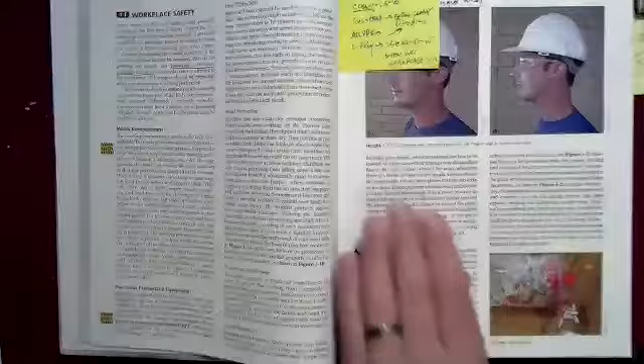So on page, I guess this is page 4 and 5 in the second edition, we get into workplace safety. The interesting thing about workplace safety is it's almost entirely behavior dependent — either the behavior of the individual who might be doing something unsafe, or the behavior of the individual who might be setting up an unsafe condition by their action or inaction for the next guy along. So it's interesting to me that horseplay is considered one of the most common unsafe acts.

If you wonder why I really come down on anybody doing horseplay in the classroom, that's because it is a big problem with workplace safety. In many classrooms, horseplay — kind of goofing around, bumping into your buddy and smacking him or whatever — I've had this in my classroom. It's sort of good, fun, jocular behavior, but don't do it. Don't do it in the classroom, and don't do it in the workplace. Horseplay is a major issue.

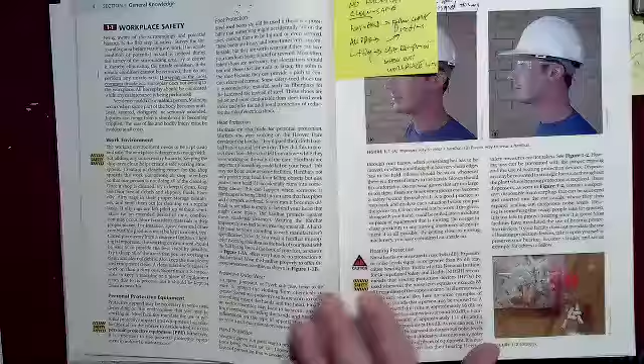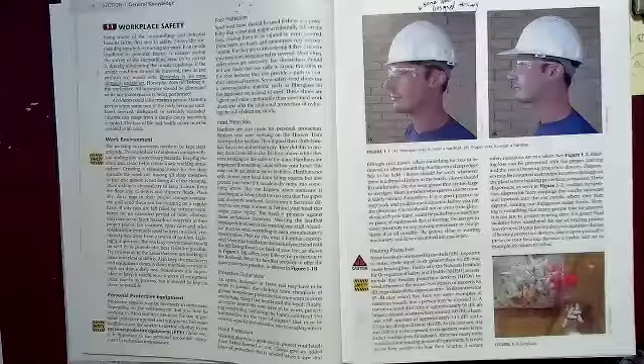Another key fact in this first area here is basically the work environment. In the old school manufacturing facilities, especially machine shops, you would always have that guy who would very carefully sweep and clean his area. At the end of every day, it was expected that you would make your area spotless. The cleanliness of your area was an indication of how much pride you had in your area, and how careful you were. That sort of work ethic has sort of slipped in a lot of workplaces where they have professional cleaning crews who come in at off shifts and do the cleaning.

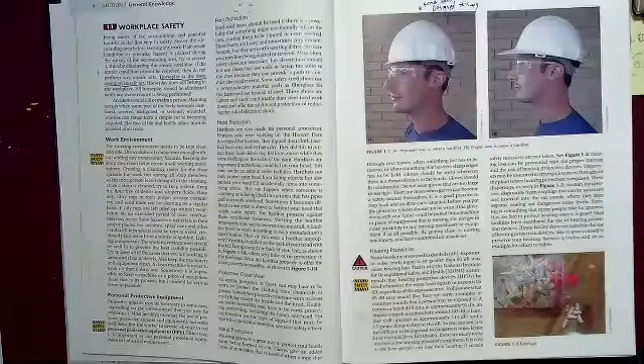But I think it's really important — the cleaner and more neat you have your workplace, the more safe it is. If you know how to reach out and find the right tool, if you don't have an oil drip or chips lying on the ground that you may step into and slip on, then you're going to have a much safer environment. So cleanliness is very, very important.

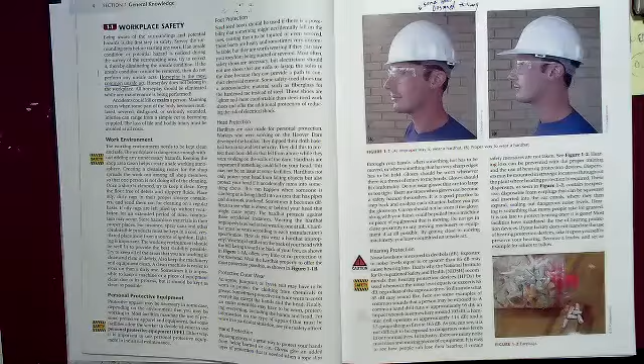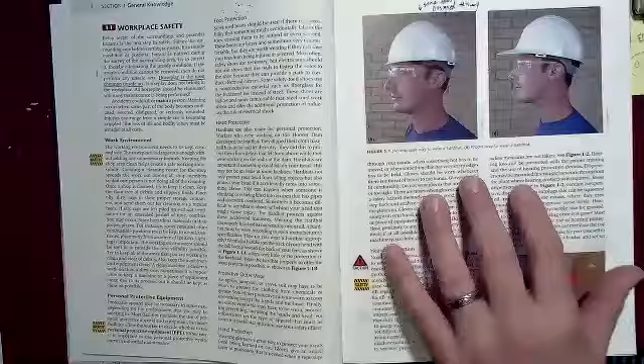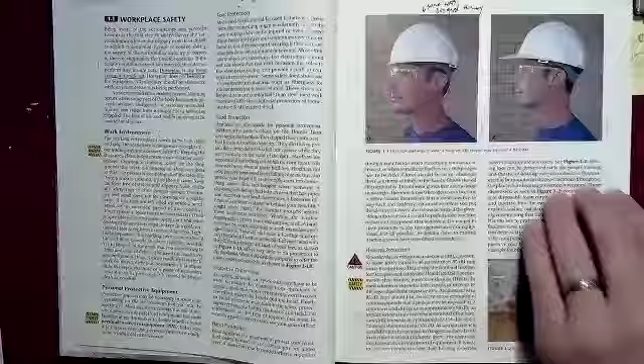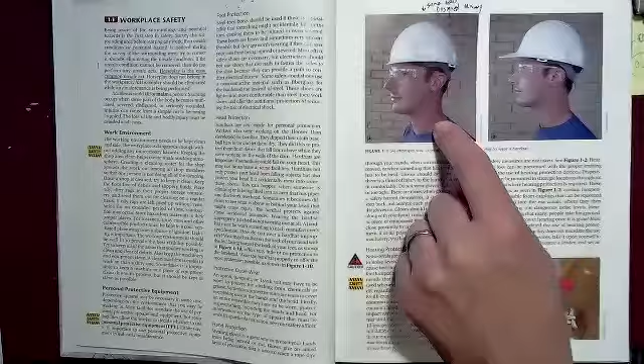PPE — you're going to learn a lot more about protective materials in your OSHA class. The book talks about PPE in a very definitive way, but the bottom line is you must follow the manufacturer's recommendation, and you must follow the recommendation of your workplace. If your workplace doesn't require PPE, you might decide to wear it anyway, but you are relying on the manufacturer's recommended use of that PPE, not the workplace. For instance, this picture here shows a guy wearing his hard hat backwards because it's cool. That particular hard hat is not designed to be worn backwards, but there are some hard hats that are designed to be worn backwards. Okay.

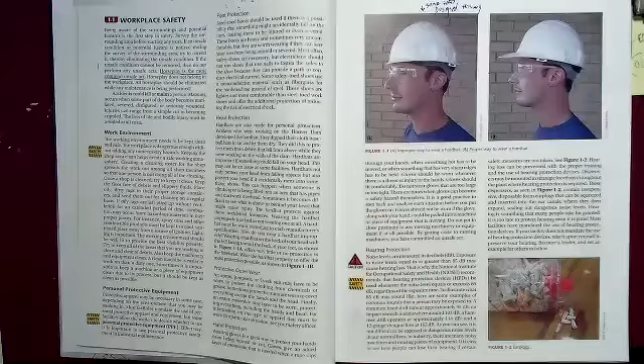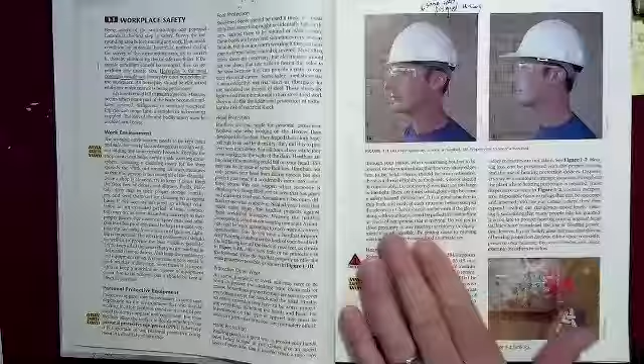Okay, so this is true for hearing protection, gloves, everything else. It's very, very important that you follow the recommendation of your workplace. And I don't think the book emphasizes that quite enough. The book talks about all this protective equipment in a sort of equal way, which is good — it kind of gives you an overview, but you must follow your workplace recommendations.

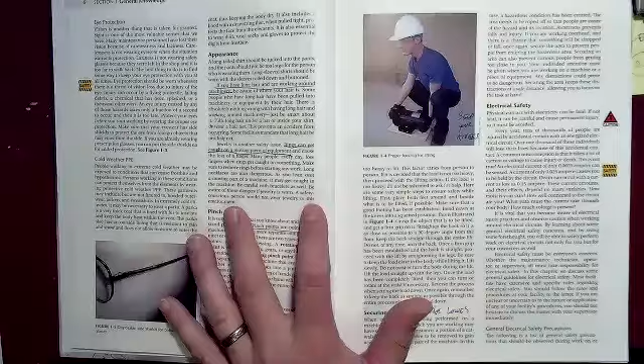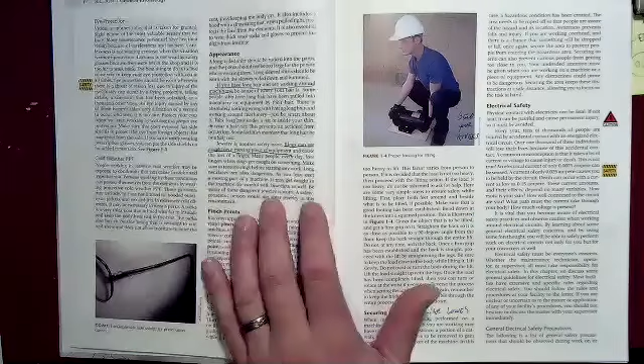I want to hit on workplace appearance. Some people get into a workplace, see people wearing very casual clothing like raggedy t-shirts and jeans with holes in them, and they get comfortable with that. I do not recommend it. If you appear professional at your workplace, people will treat you professionally.

You don't want anything dangling. You don't want long hair that can get caught in a machine. If you have long hair, keep it tied up and back if you're working around any equipment. People have been killed by their hair being pulled into moving equipment, so you have to be aware of that.

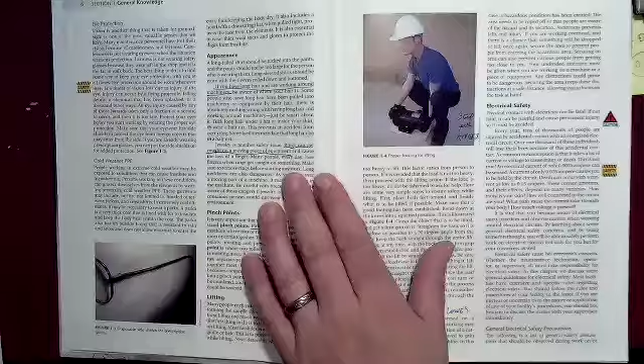You have to be aware of jewelry. My dad worked as an electrician, and he never wore his wedding ring on the job because it can get caught in mechanical systems, and gold makes a great conductor if you're working in a box, allowing electrical shock to pass through more easily. At least that was his theory—I'm not entirely sure it's true in every case.

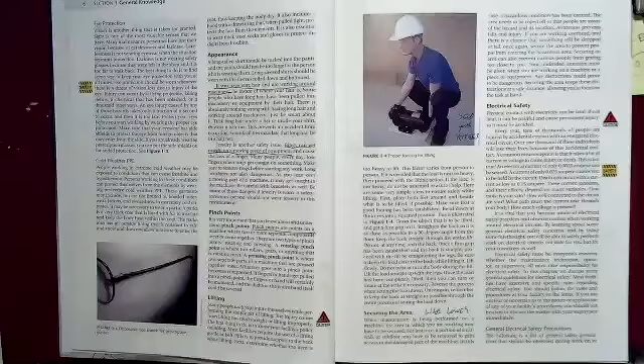So jewelry, long hair, raggedy or dangling clothing, holes in your jeans—these can all get caught on things. Look good and be safe.

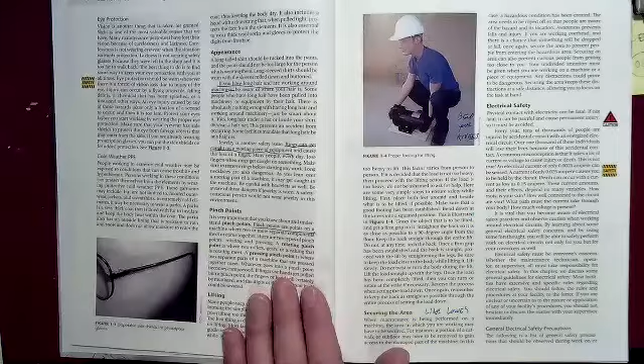Pinch points are a big issue. I used to work on a lot of equipment with big rollers, so I'm very familiar with pinch points. There are two different kinds: the rotating and the pressing. Those are two very important things to know.

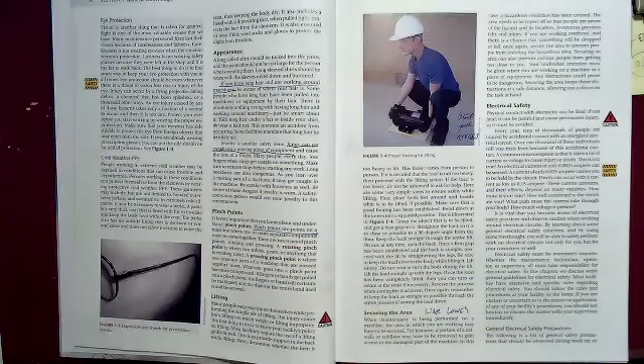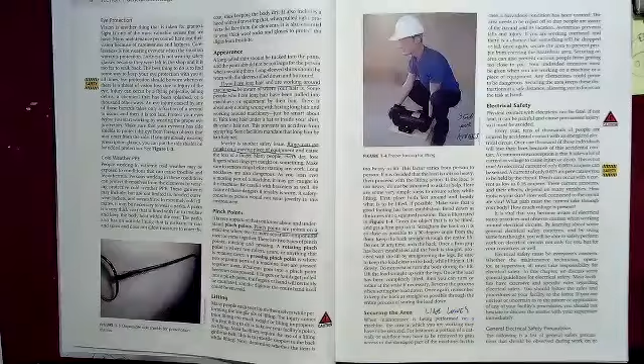The book talks about how to lift things properly, which hopefully you learned a long time ago—bend your knees to lift. But I'll say this even more: your workplace will have standards for how much weight you're allowed to lift, based on their insurance and OSHA regulations. If someone needs you to move equipment you believe is beyond what you can safely lift, don't move it. Go get a piece of equipment designed to lift and move that heavy device. Follow your workplace's recommendation.

Securing areas is good practice. Lowe's, for instance, is a great example. Every time they do a lift, they put out visual barriers so people don't walk underneath it while they're putting a pallet up onto one of their racks.

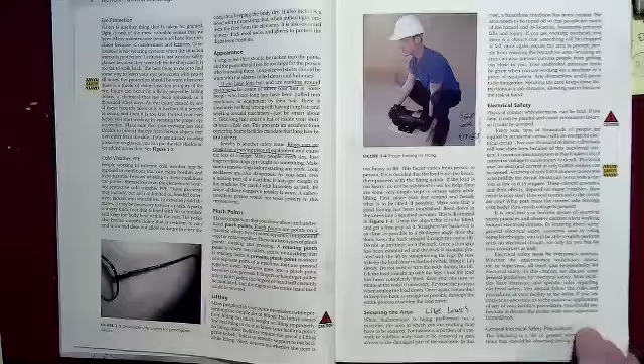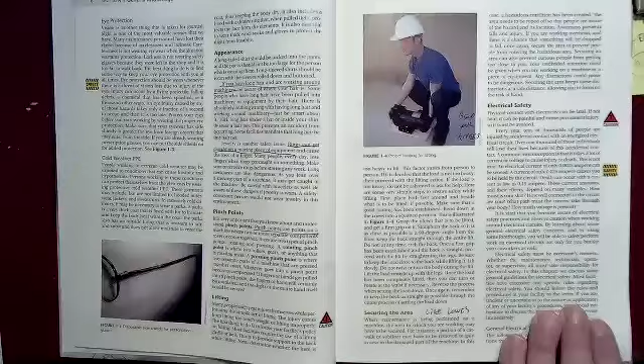Electrical safety—I'm not going to hit on that hard in this course because we have two other courses, the OSHA course and ELEC 153, that cover it, but it's still very important. We'll have a couple of quiz questions on it, like how many amps does it take to kill you? Death can occur with a current as low as 0.15 amps.

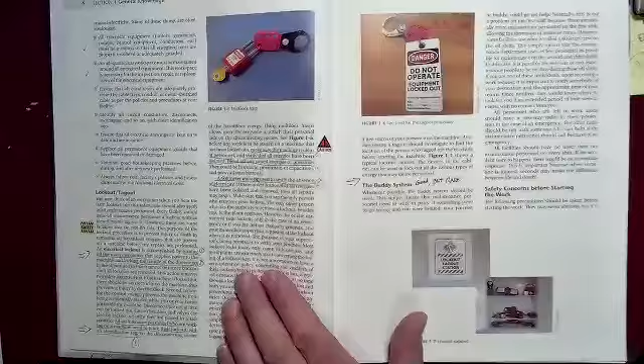Lockout/tagout—you'll cover that in OSHA and in ELEC 153. You should be well aware of the six steps in lockout/tagout; it's very important. I'm not going to dive into it in this course since you've covered it more heavily elsewhere.

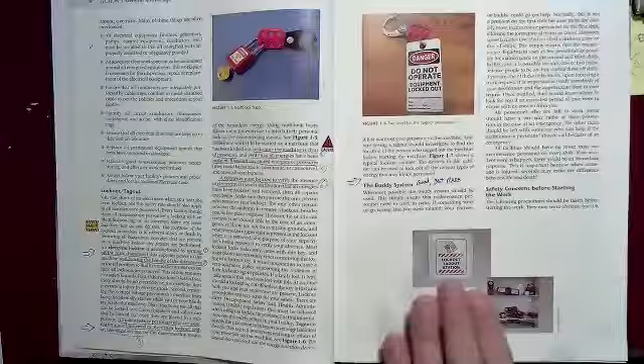The book talks about the buddy system a few times—working in pairs when you're in dangerous sites. I think that's great in theory. Some workplaces will have requirements for that, and you must follow them, but most workplaces discourage it because they don't want two people doing one person's job. So you'll have to decide for yourself, unless your company has a specific policy, whether a buddy system is required based on how dangerous the situation is.

The rest of this chapter is basically bullet items for different things you want to ask yourself in each area of safety—PPE, ladders, switches, fuses, disconnects, that sort of thing. I'll call these good punch lists. They aren't really required, but reading through them once will help spark questions on your first mechanical job, so you're not the newbie who runs into a dangerous situation. The book has a pretty good discussion of that stuff.

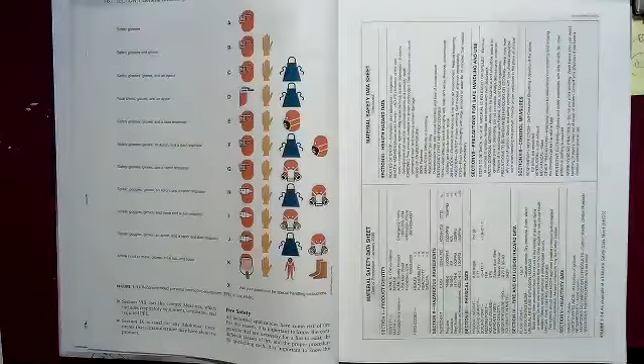MSDS are just called safety data sheets now. They're no longer MSDSs, but they're basically the sheet that describes how dangerous a chemical is that you're handling. This talks about what the content of an MSDS is, gives you examples of the PPE that might be required for different classifications, and then here's a sample MSDS. I believe the new version has updated this for current terminology.

Fire extinguisher use is also covered under OSHA, very important to understand. I urge you guys to keep fire extinguishers at home. I actually have fire extinguishers in the house, and I've done training sessions with my kids to make sure they all know how to use one.

I will urge you guys all to buy two fire extinguishers and practice with one. Go start yourself a small fire and practice putting it out, hopefully outside, not in your living room, and keep that fire extinguisher in your house. If you have kids old enough, around age 10 or older, give them some training on how to put out a fire as well. It's good stuff.

Ladders and scaffolds, there's lots of good information here. I've known a lot of professionals who screw up the ladder thing, they don't set up ladders properly. There are specific OSHA requirements, and you're going to hit on these in your OSHA class as well.

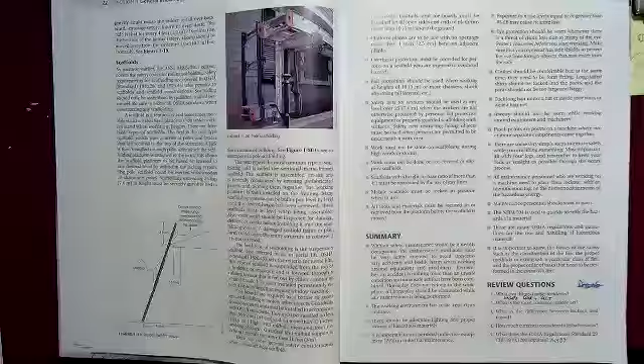Also, when you factor in your weight limit, you can't lie about your own weight. You need to add your weight plus any equipment you might be carrying up that ladder. And that's all I want to touch on in the first chapter.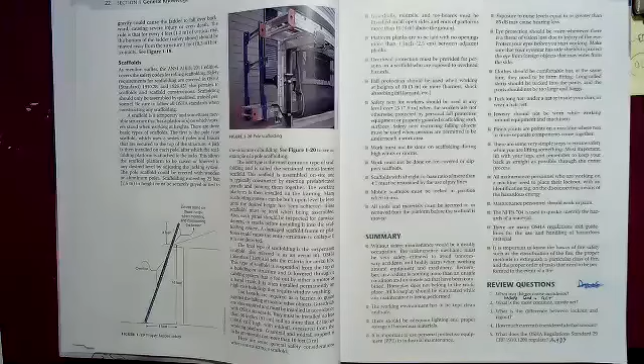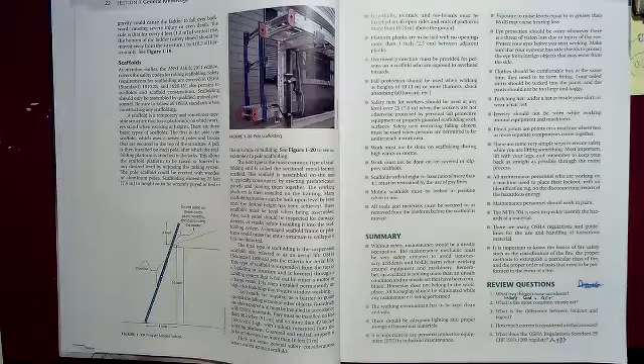You should be able to answer these review questions. For instance, two things that cause accidents: it's an unsafe condition that might be left by the previous guy, or it's an unsafe act that you do yourself, or a combination of those two things. And what does that OSHA reg cover? Well, it's the safety data sheet, or material safety data sheet.